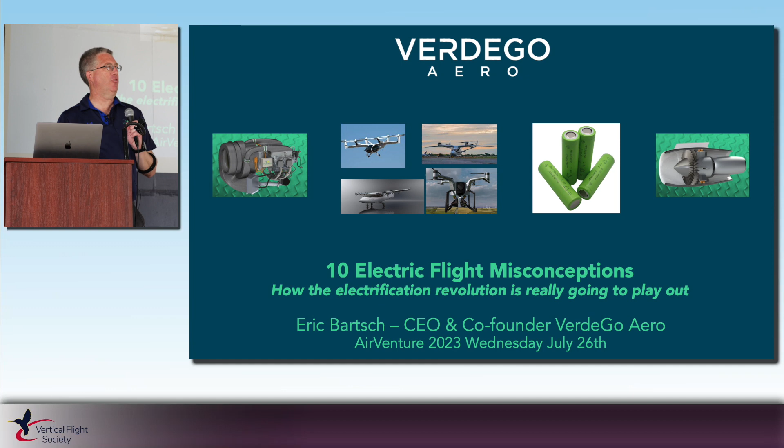So I'm going to go through the presentation that I'd like to, I'll be asking for audience participation at times, but for the rest of the questions, if we can save those for the end, be happy to address them afterwards. So my own history with electrification of flight, there are really a few different phases of it.

Going back, probably 15 years now, I was involved in the electric flight industry at a really small scale, worked with a great team at Horizon Hobby, and led a group of people that put about 4 million small aircraft into the air over those years. So we like to say that our production outstripped the entire full-scale aviation industry by many orders of magnitude. And the majority of those were electric.

There are some things that scale up from that. There are some things that really don't scale up from that.

I later was involved with full-scale electric flight. I actually got to log some flight time in some of the early battery electric aircraft, got some hands-on experience with those technologies. Learned a lot about what's great about electrification and learned quite a bit about what's not great about electrification. And as with any technology, it's a tool, can be used for the right things, can be used for the wrong things.

And then more recently, I'm one of the 3 co-founders of VerdeGo Aero, a propulsion company that is developing hybrid electric power systems for the electric aircraft market. I'll go into some of the rationale behind why we do what we do and why that's compelling for certain markets.

And along the way, I've done a lot of flying in basically any type of aircraft I can get my hands on. I'm a decent fixed wing pilot. I'm a terrible rotary wing pilot, not yet licensed there, but aspire to be it eventually.

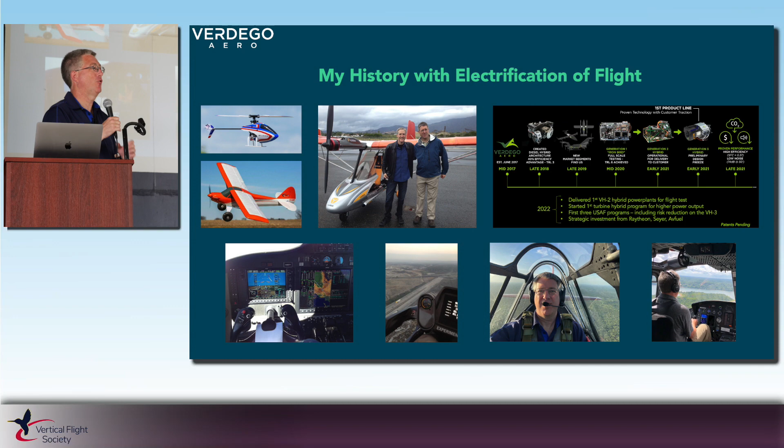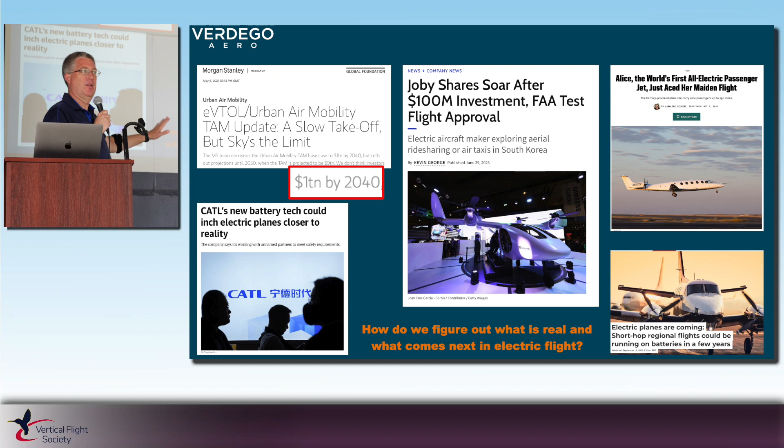There's a lot of hype out there. There are a lot of people saying, okay, this is going to change everything. There are billions of dollars flowing into companies in this space. Some of that's going in really good directions. Some of that may not be going in good directions. And so part of why I'm here today, and I think part of why you're here today, is to talk about how do we figure out what's real and what's really going to come next in electric flight, and maybe sift through all of this to find those nuggets of wisdom.

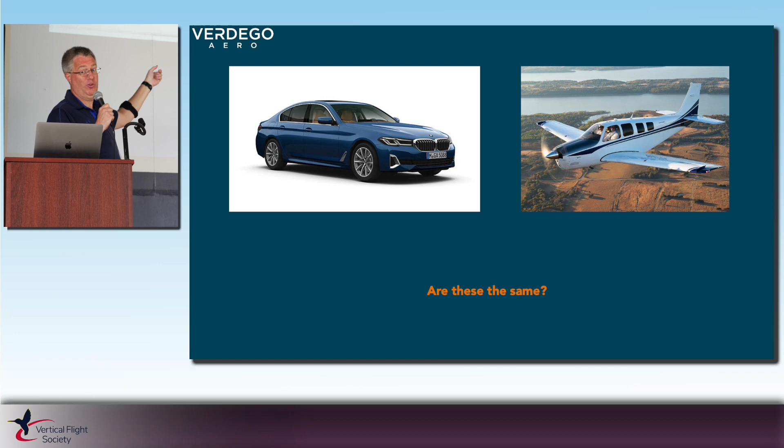So here's the first audience participation question. Are these two things the same? No. What's the thing up here, the blue thing? It's a car. What's the thing over there? It's an airplane. These are not the same thing. Now, that wasn't very hard to figure out. And they're not the same for a whole bunch of reasons: cost, weight, technologies, business model, manufacturing, regulation, performance. There's really not much in common between these two things, other than the fact that they do have internal combustion engines. So I'll give them that.

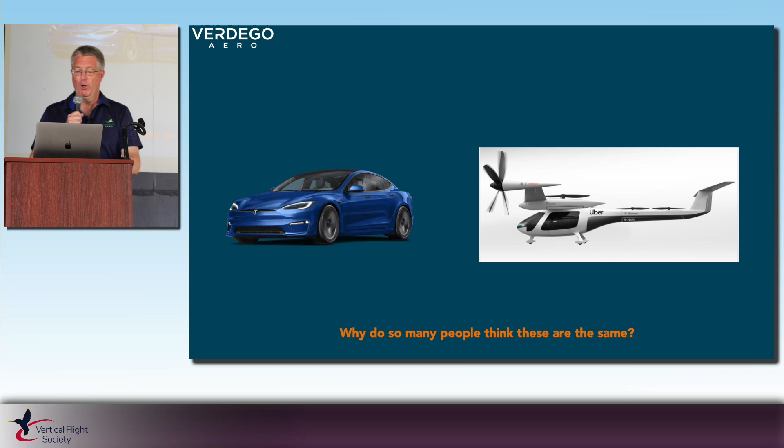It's important to acknowledge that these are not at all the same things, although electrification has a role with both of them. So what we know about electrifying and even hybridizing cars is not particularly relevant to what we do to electrify or even hybridize an airplane. Electrification is very relevant for aviation, but it's going to play out quite a bit differently.

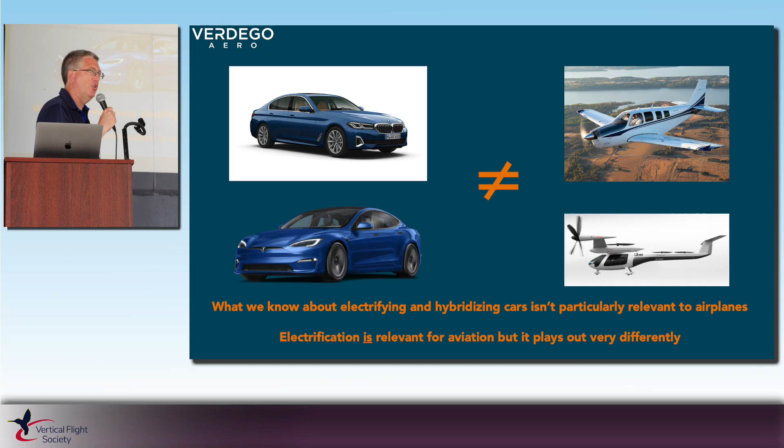So batteries, electric motors, and electrification itself are all technologies and technology tools that we can use in a variety of aircraft markets. When they're used for what they're good for, you can have amazing results. When they're improperly used, it's like banging on a bolt with a hammer. It's not going to work. And there are billions of dollars of hammers banging on bolts right now. And that's something that's just not going to work.

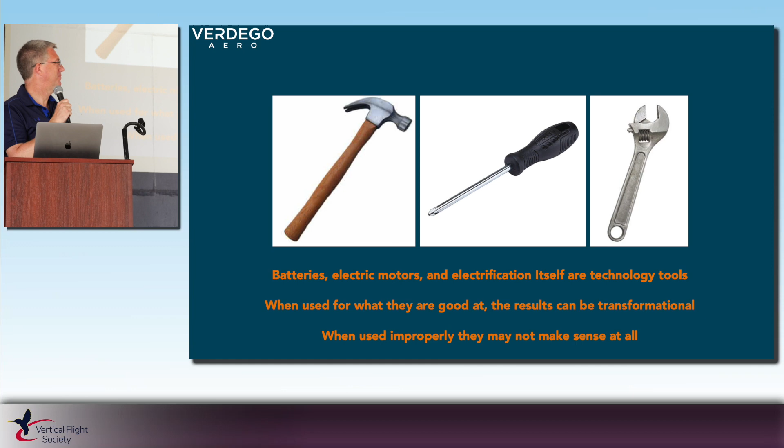And so when tools are used properly, they're great. When they're used improperly, not so great. All right, so a couple disclaimers as I go into the main part of the presentation.

There are a huge number of aircraft designs, missions, and use cases that are out there. And one of the really cool things about the current phase of the aerospace industry is that we're in a bit of a divergent phase. People are back to trying new things that may or may not work. We've got hundreds of companies going in different directions with electrification. That's a very good thing. It's a necessary thing in the early stages of adopting a new technology. And so there's a big diversity of use cases and examples out there.

My presentation today is about how electrification is likely to play out on a large scale, what the biggest opportunities and the biggest markets are. That doesn't mean that there aren't a few corner cases that violate some of the rules that I'm going to talk about. There are some. I could do a whole separate presentation on weird corner cases where there are exceptions to the rules that I'm talking about.

But today is talking about the biggest opportunities and the biggest trends that we ought to watch in the electrification space, and why some of the things that we may all be paying attention to now might not be the right things to pay attention to.

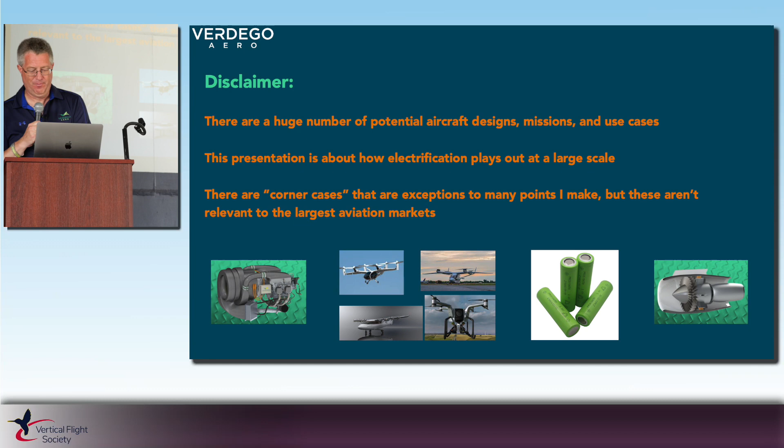So when we think about aircraft propulsion, there have really been two major revolutions in aircraft propulsion in about 120 years. One was the piston engine, because before the Wright brothers had piston engines, we had gliders. And I think we can all agree that once we had piston engines in airplanes, we had transformations in what they could do. And I'm a sailplane pilot, I love gliders, but you can do a whole lot of different things with a powered aircraft that you can't do with a glider. And then along through the 40s, 50s, and 60s, the jet engine appeared.

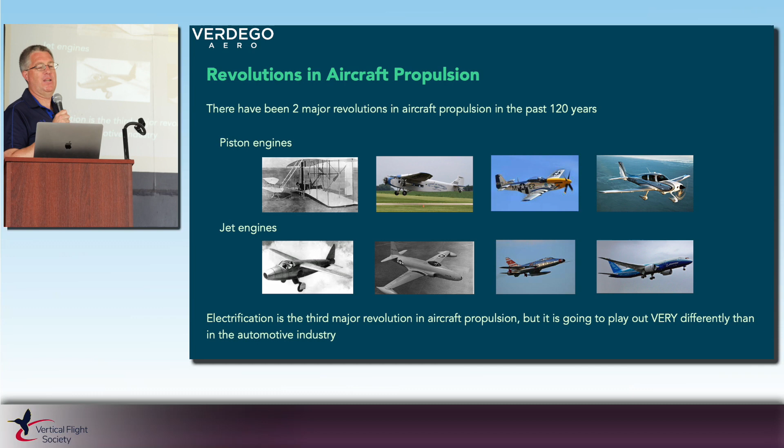And that once again created a transformation in what you could do with an aircraft. And electrification, we're at the outset of a third major revolution in aircraft propulsion, but it's going to play out very differently than how it has in the automotive industry.

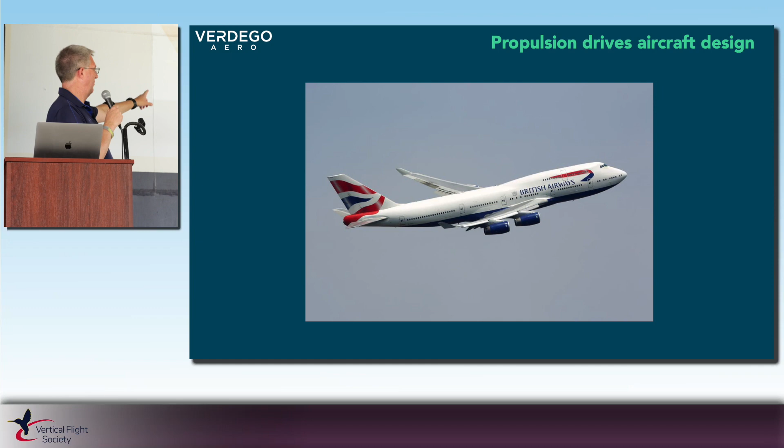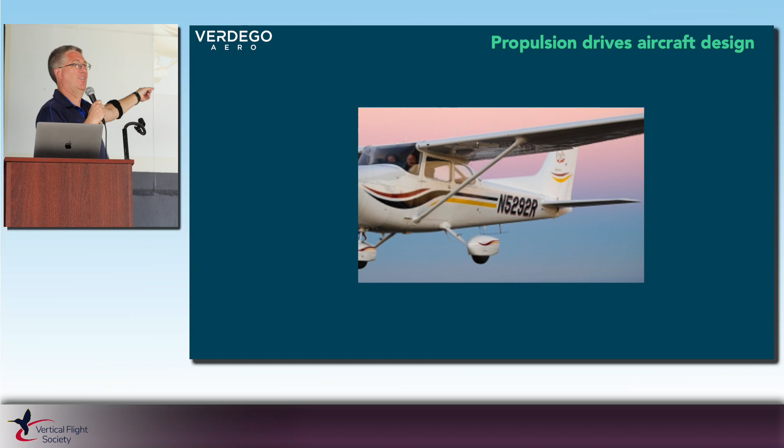So this is another audience participation question. That airplane there, you can't see the power plants or the propulsion system in any way. Is that a jet or is that a piston engine aircraft? It's a jet. That's correct. It is a jet. All right, you can't see the propulsion system here at all. Is this a jet or is this a piston engine aircraft? It's a piston. All right, can't see it here again. Is this a jet or a piston? Jet.

Piston, exactly. All right, that's a rocket. That was a trick question.

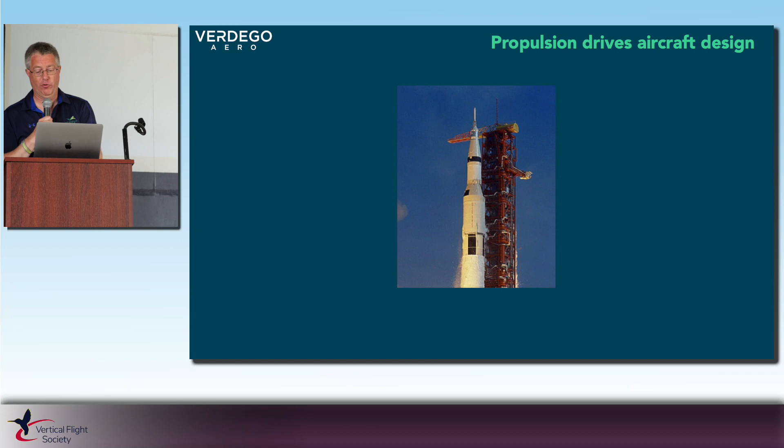The amazing thing is you could show these aircraft to the average person, but this is an aviation enthusiast audience—we know a lot about aircraft and can probably name every one shown and its history. What's interesting is we saw all those aircraft but not their propulsion systems. You know by looking at the airframe what kind of propulsion it is, because the power plant impacts how the aircraft looks, how it's configured and structured, and what missions it can do. So the optimal airframe for one type of propulsion is usually a bad fit for other means of propulsion.

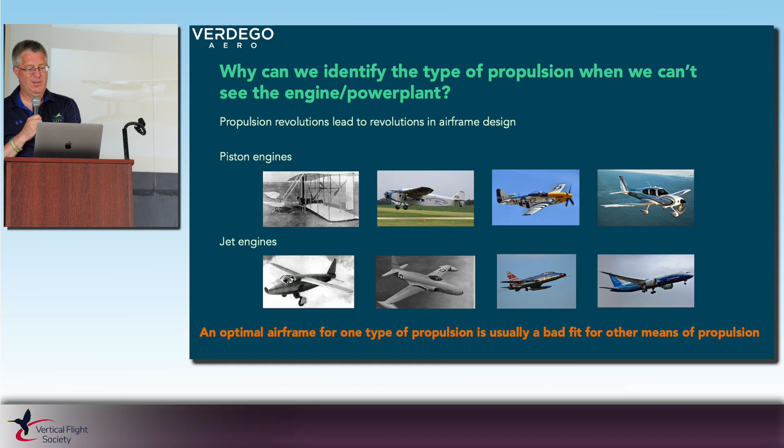That actually makes sense. Misconception number one—I said there'd be ten of these—is that electric aircraft are somehow going to look like conventional aircraft but with batteries and motors. Propulsion revolutions lead to revolutions in how you design the aircraft. Electric aircraft should look like electric aircraft, just like a jet looks like a jet. There are reasons why piston engine aircraft, jets, and now electric aircraft all look very different.

Over the next decade, we're all going to get a lot more used to looking at these things. Just as we all picked out what the jets were and what the piston engine aircraft were, there are things that lend themselves to being done with electrification.

We have to keep in mind—this is one of my favorite Photoshops—putting electrification on the wrong airframes is kind of like saying turbofans are great, Cessna 172s are great, so they'd be even better with a turbofan. You could do that, I'd even fly it, but I guarantee it would be a worse airplane in every aspect—useful load, efficiency, noise, you name it. That would be a bad aircraft. A Cessna 172 should have a piston engine in front. So that's probably not the big idea, and we shouldn't do that with electric motors.

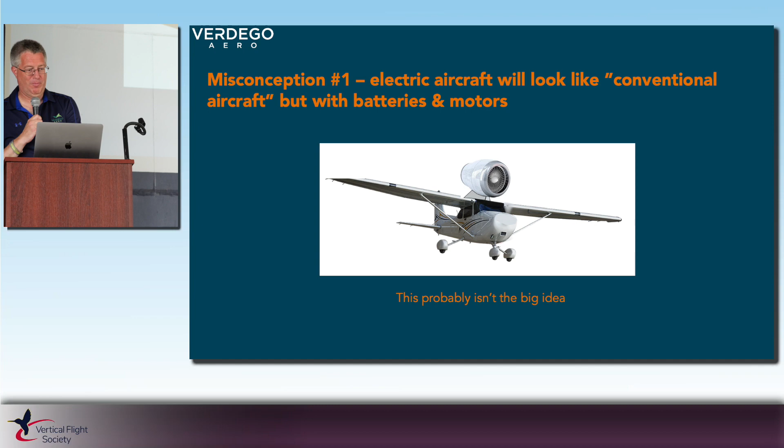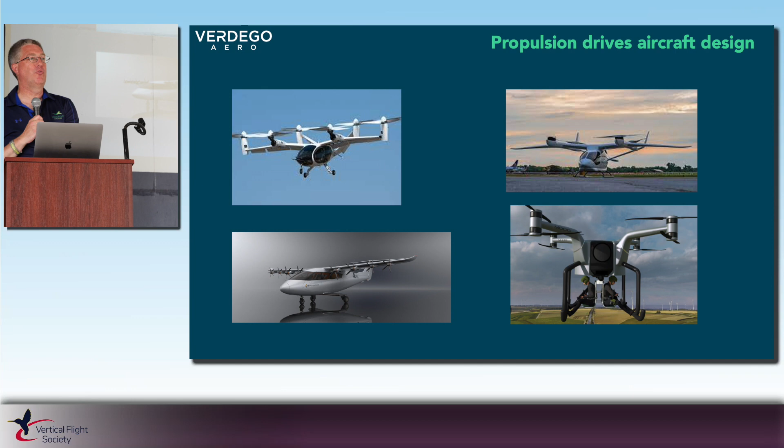I heard propellers, I heard electric motors, multiple electric motors—I like that one. Notice nobody said batteries, because batteries aren't actually visible in any of these aircraft. What is visible is a bunch of electric motors scattered around an airframe doing different things. In some cases we're managing airflow over the whole wing, in some cases converting from vertical to horizontal flight. You can see that all of these aircraft are built around having a bunch of electric motors. That's different—something we don't typically see with piston engines or turbine engines. There's a reason for that.

Electric motors are amazing things. They are responsive, lightweight, have unique torque curves, can run at really low RPM or high RPM, and scale in size differently. It's actually practical to have a whole bunch of electric motors instead of one or two big ones. They're reliable, simple, low cost, and we have high performance solutions right now. These technologies exist—there are companies out there that can make great electric motors you can put on an airplane. I'd say electric motors are the biggest idea out there in electrification, the enabling technology that makes electrification interesting.

Next on the list, power transmissions. There have been a lot of really interesting experimental aircraft programs, particularly in the 50s and 60s, for convertible aircraft designs that could fly vertically and horizontally. The Achilles heel of almost all those programs was both control and mechanical complexity. There were drive shafts, gearboxes, and all manner of systems to transmit power around those airframes, resulting in a really complex, really unreliable powertrain. Those aren't particularly good things in an aircraft.

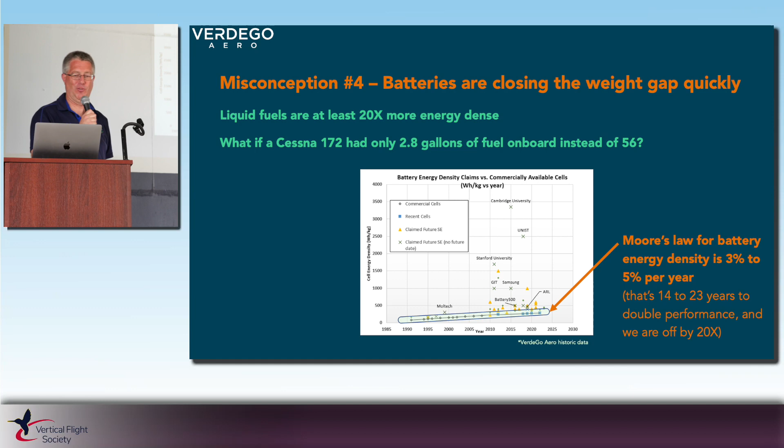So, all right, batteries, they haven't progressed. Let's set aside what I just talked about. Let's say, yeah, but what if one of these things announced about energy density comes true and batteries get a whole lot lighter? Is energy density the only thing holding us back, or is that just the thing we talk about most? Well, there are a lot of things actually holding us back. Energy density gets the attention because there's a factor of 20 problem there. But I'll say that if all we had in aviation were batteries, and someone ran in with a gallon of jet fuel or avgas and said, hey, check this out, I've got a different way to package energy, they'd get a Nobel Prize. There'd be a statue in the center plaza of AirVenture for them.

So liquid fuels get lighter as they are used. Batteries don't. You can trade energy for payload. I think a lot of us in the room that are pilots, sometimes you take off with fuel to the tabs so you can put an extra person in the plane. There is no such thing as filling a battery to the tabs when it comes to weight. It weighs as much whether it's empty or full. The last drop of fuel is as good as the first. Batteries have a particular issue where as they drain, you can't pull power out of them to the same degree you could at the beginning of the charge. That's a big problem because as pilots, we're used to consistency. We like to make sure that at the end of the flight, the powertrain behaves as well as it did at the beginning of the flight.

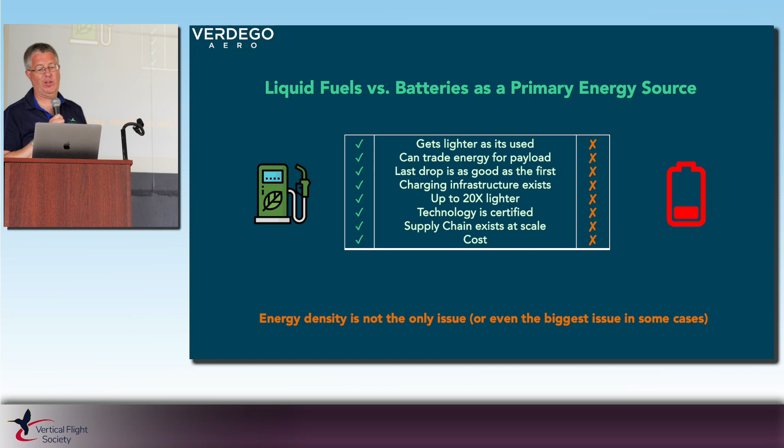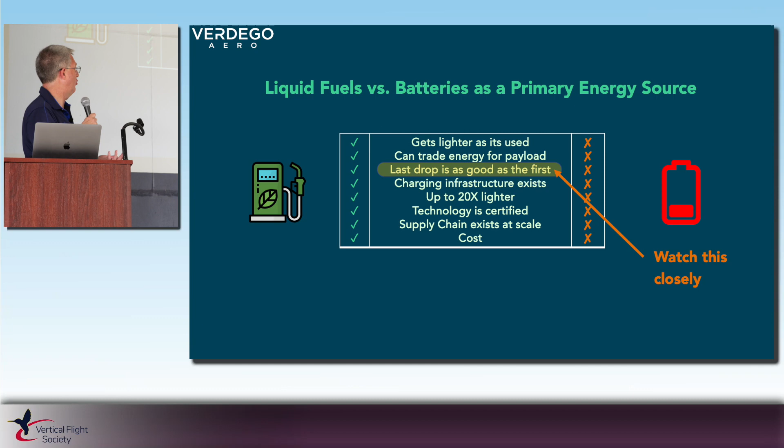It's not even the biggest one in some cases. And the one that I've experienced firsthand as a pilot in the air in a battery electric aircraft - that last drop being as good as the first - that's a really hard one to solve in a battery. Even if you had equal energy density between liquid fuels and batteries, some of these others are really big Achilles heels for using a battery to be the primary way you store energy in an aircraft for its mission.

So misconception 5: batteries just need to get lighter and then it all works out magically. It doesn't. Batteries need to get better in a whole bunch of ways if we want to use them as a primary energy source in aviation. I'll get back to that one in a few minutes here, but that's really important.

So what about really, really short flights for battery-operated aircraft? That's something we talk about a lot. Well, if we just want to go a really short distance, let's start there, because then that's all going to work out. So we're going to do these short hops. We'll leave the long flights till later, push that one down the road.

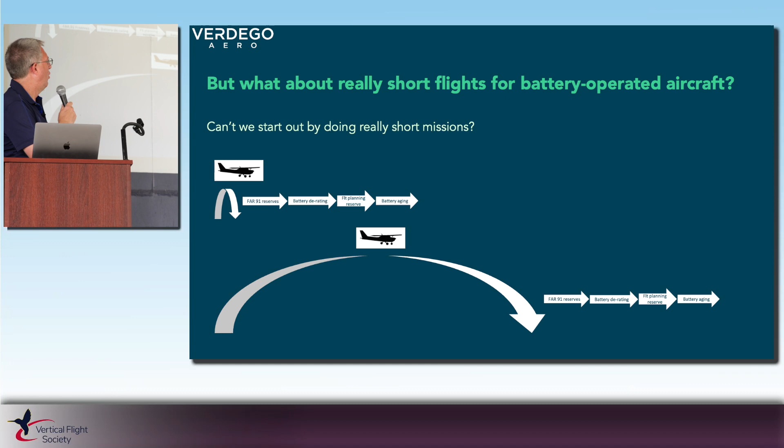Well, we can't just plan energy on an aircraft for where we're going to go. We have to think about energy reserves. We need to think about derating in the case of a battery, because you can't get to all of that energy. We need to think about flight planning reserves - are we going to be able to go in a straight line or not? We need to think about the aging of the battery. As I mentioned, the battery effectively shrinks every time you use it - it's like you've got a fuel tank that shrinks a little bit every time you fill it up and drain it. We've got to flight plan and write the manuals for the aircraft as if the battery's at the end of its life, not the beginning of its life. So the problem is that all of this other stuff is the same whether you're flying a really, really short flight or a really, really long flight.

That gets us into these weird design spaces where our team has looked at design cases where your energy reserves are all of a sudden 10 times what your mission is. That's something we've never really dealt with before in aviation. We're always used to the mission being the majority of the energy, with some reserve added on for safety. That can get flipped completely. If you're looking at really short missions, the reserve becomes huge, and you may have a 5-mile flight that requires 150 miles of extra energy on board to be legal and safe.

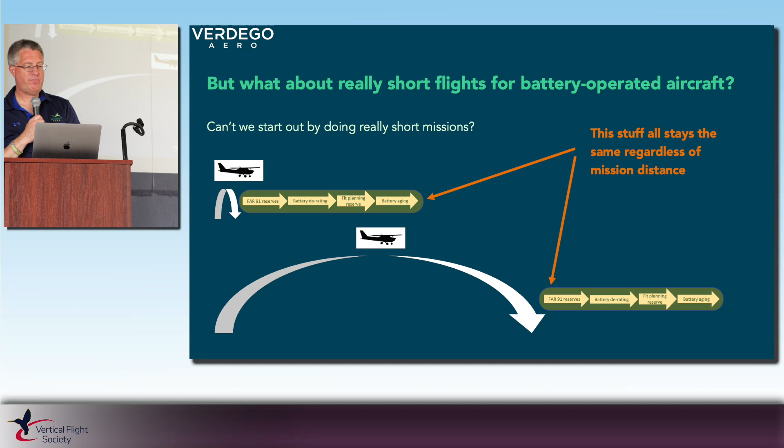So, misconception number 6: operating a really short flight gets around the limitation of batteries. And it does, to an extent, but perhaps not enough to really help us do the things we want to do. We wind up with a whole lot more reserve energy than mission energy.

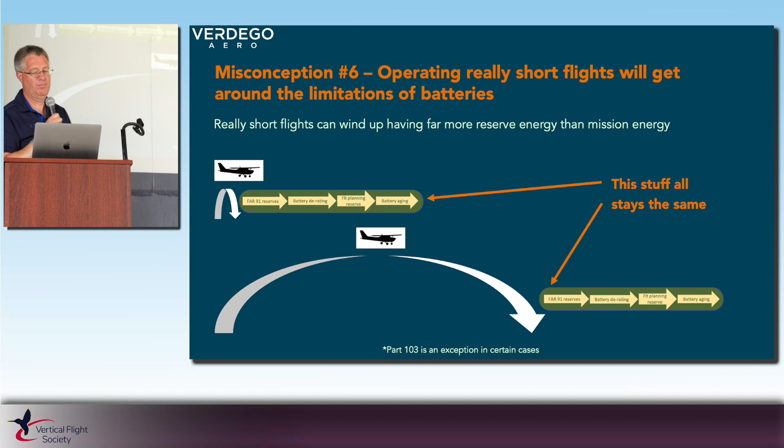So if batteries aren't able to deliver the mission capability we want in the aircraft, is there a point to electrification at all? Should we abandon this and go in a different direction? If there's a 20 times energy deficit, why would we bother doing this? That's an interesting question, especially for those of us who work in this industry. So, unsurprisingly, I have some answers to that.

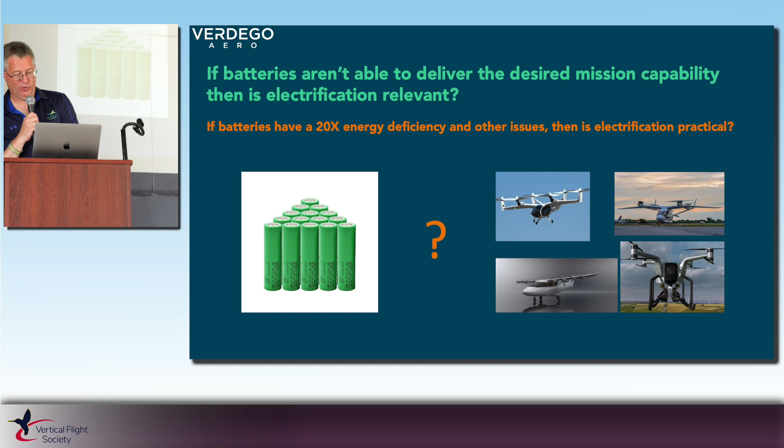There are some interesting motivations for electrifying an aircraft that allow you to design something you couldn't have before. One of them is distributed electric propulsion — having a whole bunch of motors instead of 1 or 2 propulsion units. That allows you to control the airflow and control the thrust over a lot of different places on the airframe. That's kind of interesting.

One of the things you can do with that is merge together attitude control and propulsion. Every small-scale drone sold in the hobby industry does that — the attitude control, the pitch, yaw, and roll, is driven by the same electric motors that drive the propulsion. So all of a sudden you can blur the lines between those things.

You can do active aerodynamics. You can control the boundary layer over parts of the aircraft. You can have different numbers of power generation and thrust units. And you can optimize for peaks and valleys of power — optimizing for steady state energy consumption in an aircraft versus the peaks you might have on takeoff or climb.

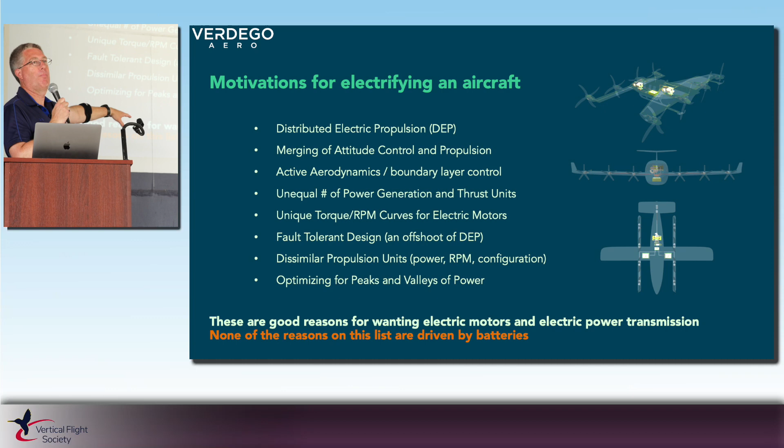One of the things that then comes into play is the concept of a hybrid electric power plant. Full disclosure, this is what my company VerdeGo works on — I could talk forever about these, but I won't. A hybrid electric power plant: liquid fuels go in, propulsive electricity comes out. That enables the benefits of electric motors and electric power transmissions to be realized, and gets around some of the mission-related limitations of batteries.

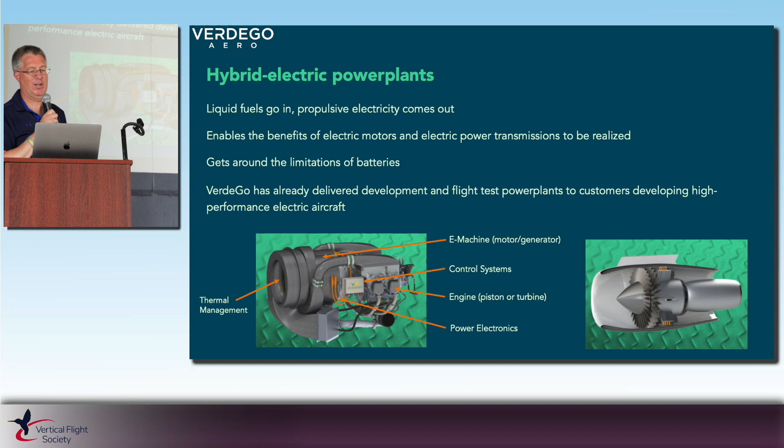These systems, whether designed around a piston engine or a turbine engine, bring together a conventional piston or turbine engine, a motor generator, power electronics, control systems, and cooling and thermal management systems. What you get is an integrated unit that can provide propulsive energy electrically and in some cases mechanically, depending on if it's a series or parallel hybrid configuration. That allows you to have aircraft that depend on electric motors but have a lot more mission capability.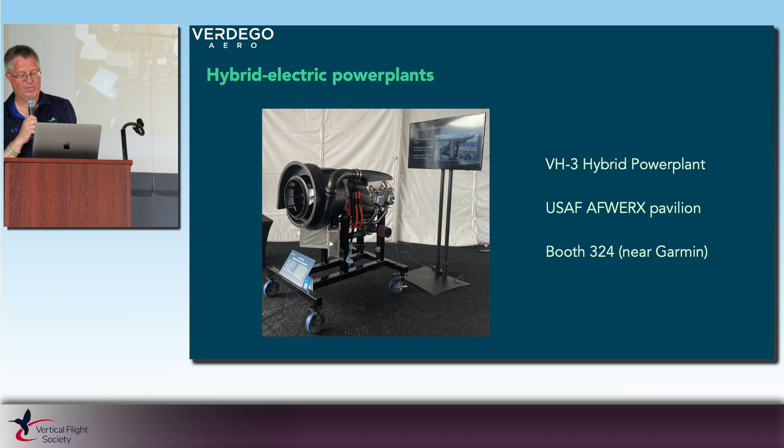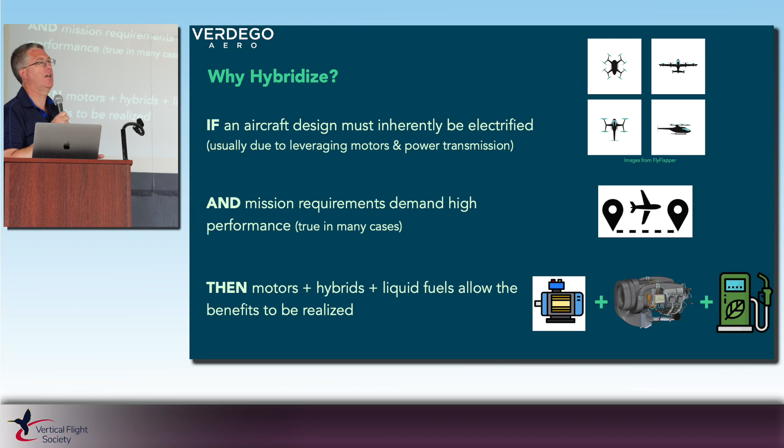So why might we want to hybridize an aircraft and put a hybrid power plant in it? There's really a simple equation that governs that. If an aircraft design inherently has to be electrified, you can't have that architecture any other way. I've got some silhouettes of strange looking things that look like electric aircraft, and the mission requirements demand high performance. Using electric motors and power distribution in those aircraft is the only way you're going to get that aircraft. Using hybrids and liquid fuels is how you get the mission capability, and that's how you make this whole thing useful - you design an electric aircraft and run it on liquid fuels, but you're getting an aircraft you couldn't have before, potentially one that can do a mission profile it couldn't do before.

Misconception number 7: batteries have to get a lot better before electrification is compelling. There are a lot of things we can do right now with technologies we have right now by applying hybridization, liquid fuels, electric power transmission, and electric motors. In fact, there's a lot of exciting work going on for both military and civilian missions doing just that, combining these things together. We don't have to wait 5 years or 10 years or 25 years for a technology to get better. We can combine technologies that exist now - building blocks, Legos if you will - and plug them together in different ways to get things that are viable in the near future, not the far future.

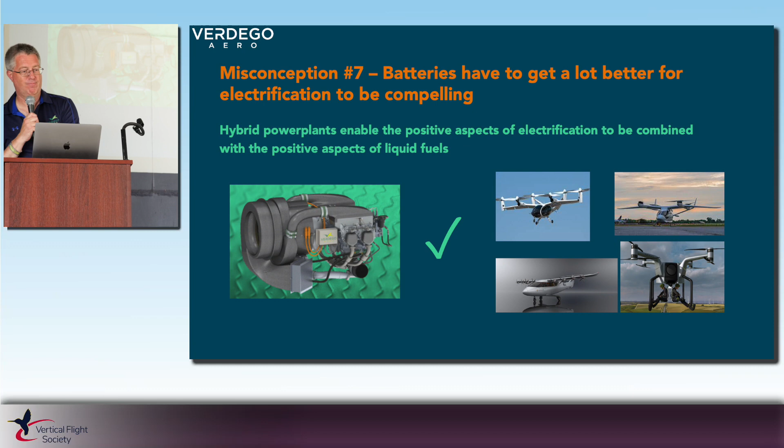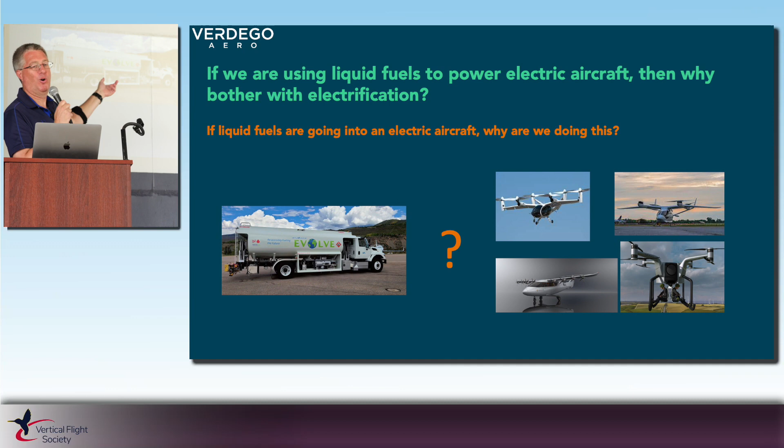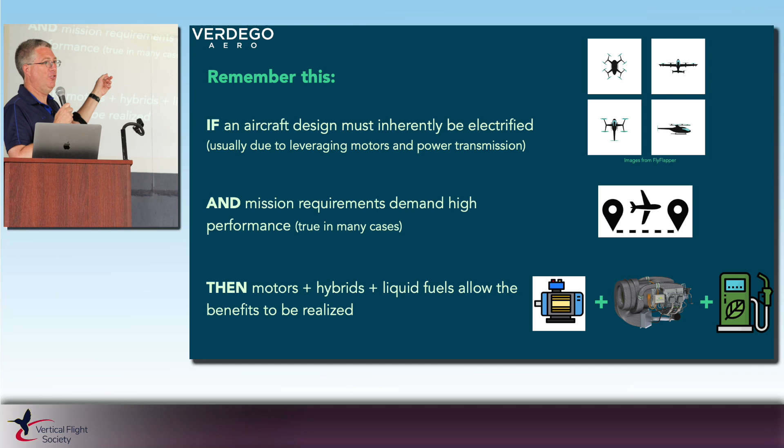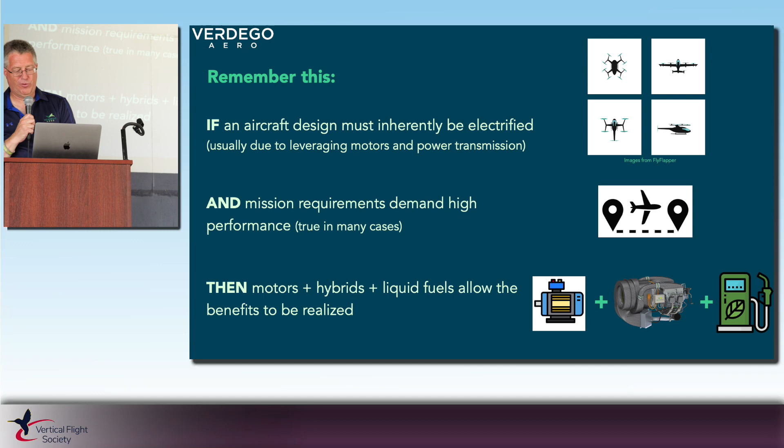At the same time, one of the big factors here is that when we look at using liquid fuels in an electric aircraft, there's a big trend going on right now in parallel with electrification, and that is sustainable aviation fuel. That's a much bigger trend for the jet fuel market than the avgas market. It's really critical that billions of dollars of investment are going into creating manufactured liquid fuels that are basically jet fuel, but with a much lower net emissions profile. In a lot of these cases, you're pulling carbon out of the atmosphere when you make the fuel, you put it in the plane, you release it back into the atmosphere, and you keep going around that cycle such that you've got either very low or no net emissions.

So the R&D for these fuels is largely done because they are certified. United Airlines, as an example, has already done revenue service flights with transport category aircraft with SAF in the fuel tanks. So this is certified, it exists. The big challenges for SAF are getting the supply chain large enough and the costs down low enough so that it's viable. But when we talk about liquid fuels, it's not just the liquid fuels we have right now - there are also the liquid fuels we'll have in the future.

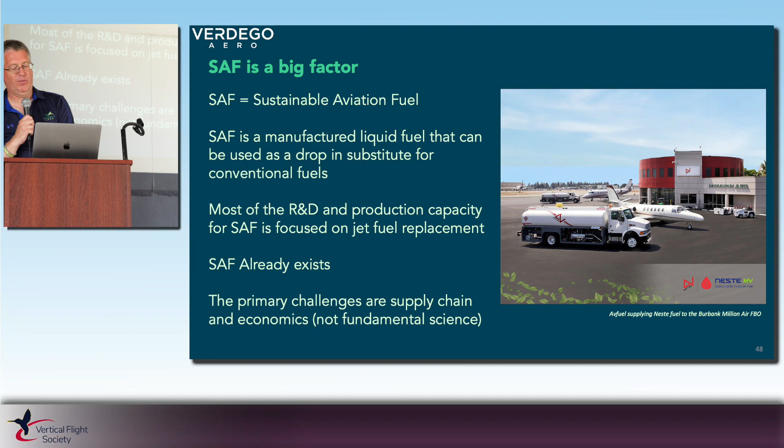Liquid fuels are a more convenient way to package energy than a battery as a primary source of energy. As we look at the gigantic value of all the infrastructure, all of the transport category aircraft, and the fact that SAF already has huge momentum, I would say that SAF is an inevitability. We're going to see more and more of that, and that's already way down the path. Hydrogen and really energy-dense batteries are not necessarily an inevitability. They might play out, they might never play out.

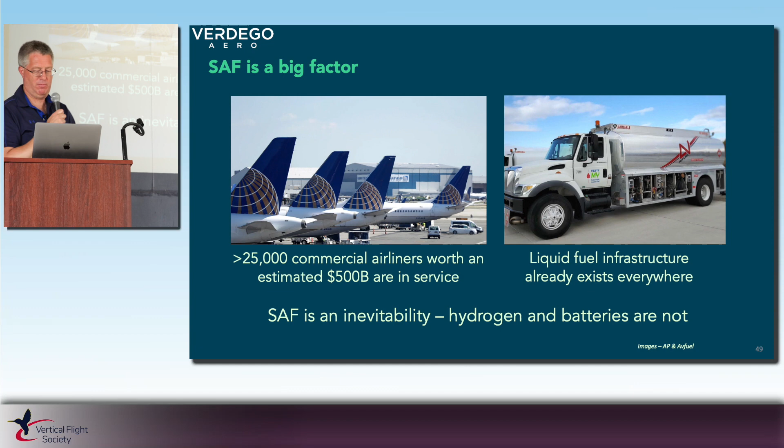So remember this equation again, and I've modified it just a little bit: if an aircraft has to be electrified and we need significant mission requirements, then motors and hybrids and SAF allow you to get those benefits sustainably. It brings together two things that are often thought of as separate directions in sustainable aviation: electrification and sustainable fuels. Those have separate paths that they may take. You may also see those come together in some applications and be two parts of a bigger picture.

Misconception number 8: electric aircraft are only driven by sustainability. People often think we're electrifying to be sustainable. Well, yes, in some cases that's true, but that's not the only purpose for electrification. Remember that list of motivations for electrifying an aircraft? A lot of those could be applied in the name of efficiency or lower operating cost, but they could also be applied for more maneuverability, higher redundancy, higher safety, lower noise, other things not related to sustainability. So electrification is not just sustainability. Electrification is how you get new types of aircraft that we can't have right now.

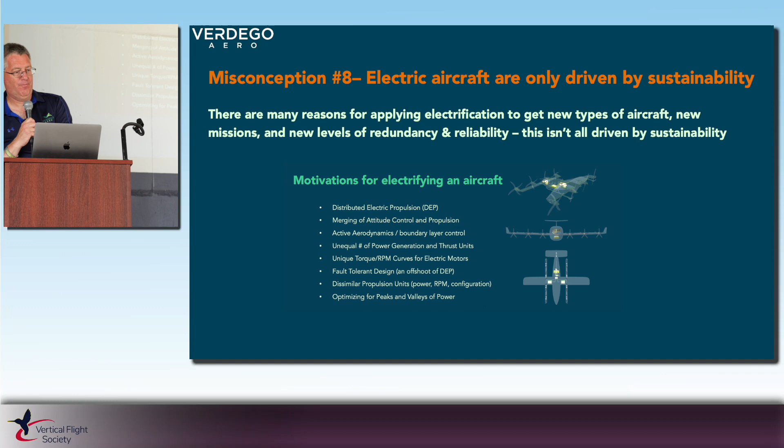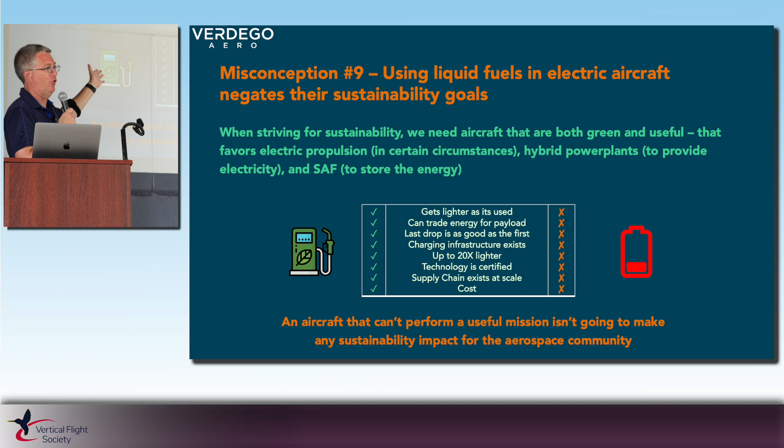However, the converse is also true. Misconception number 9: if we put liquid fuels in the electric aircraft, then we're completely negating the sustainability goals. That's not true either. When we design these aircraft with distributed electric propulsion, they're inherently more efficient to operate than a conventional aircraft. So right there we can make something that consumes less fuel and emits less pollutants. We can use SAF as the liquid fuel in these aircraft and get some pretty dramatic reductions in emissions. So even using liquid fuels, we aren't negating the fact that we can achieve impressive sustainability results for aviation using a hybrid electric approach, where sustainable fuels come together with the benefits of electrification.

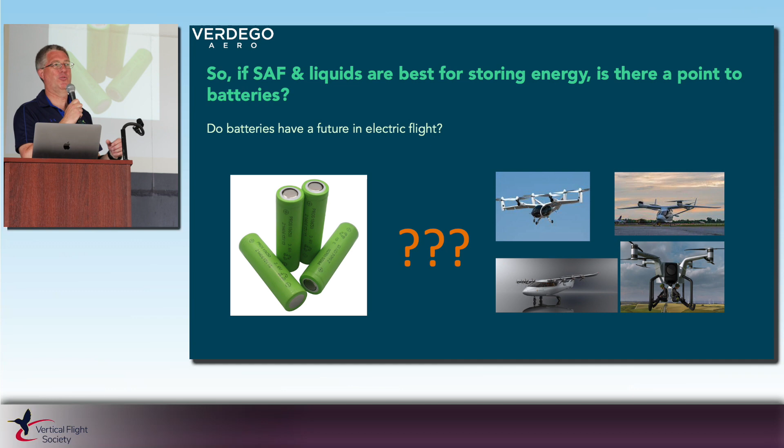This is one I like: if sustainable aviation fuel is great and liquids are best for storing energy, is there even a point to batteries? I've said a lot of unflattering things about batteries. Is there a point to these? This is kind of the flip side. I hear a lot of people saying batteries will never be useful, they'll never amount to anything. That's not necessarily the point I'm making, and this comes back to the right tool for the right job.

Let's talk a little bit about cars. Even though cars aren't very relevant here, there are a couple of analogies we can draw. How many people have heard about range anxiety in electric cars? How many have experienced it? I've experienced that driving toward a charging station a couple times. It's very real among electric car owners, and having flown a battery electric aircraft a few times, it's really, really real in the air. Watching it discharge is not fun. So range anxiety is not a good thing.

Range is all about energy. But how many people have been in a Tesla or electric car when someone really stepped on the accelerator and went fast? That's impressive — you have four-door family sedans that can out-accelerate a Ferrari. So there's something different there. We never used to have that in the automotive world. Acceleration isn't about energy, it's about power. And the only people with acceleration anxiety are the people designing gas cars right now, because they can't compete with what the electrics can do. This starts to hint that we've got a tool here that's useful, but maybe we're applying it the wrong way.

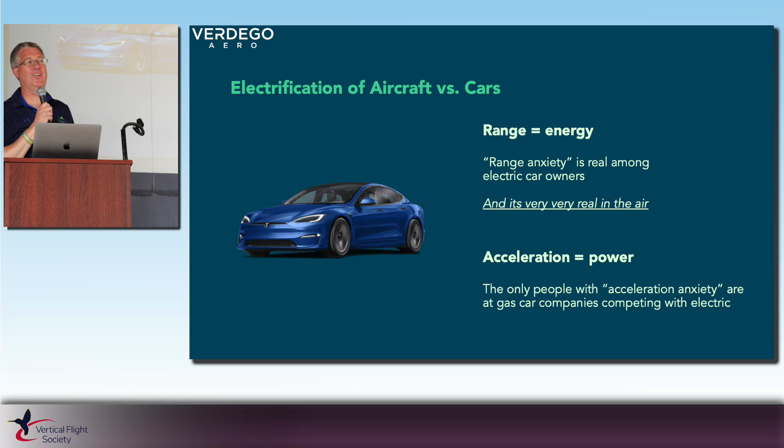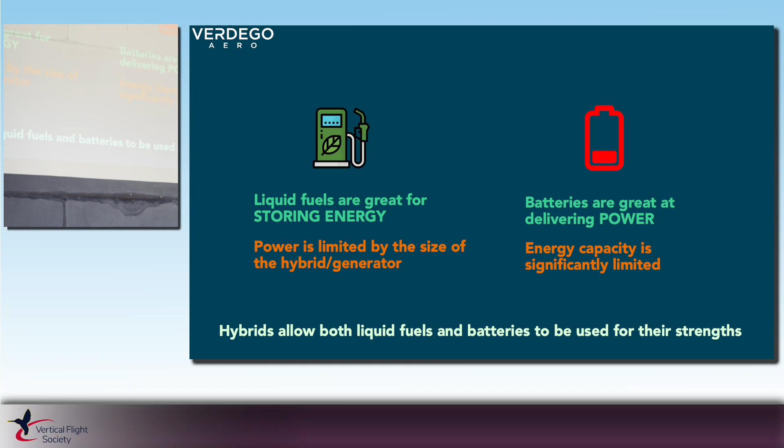Liquid fuels are really good at storing energy — there was that whole list of things I mentioned earlier. They get lighter as we use them, and we can trade payload for onboard energy. But the power you can get out of liquid fuels, unless you light the whole tank of fuel on fire all at once — and that's not a good idea — is limited by the size of the generator or engine. You can't just tell a 300 horsepower engine, 'why don't we run you at 1,000 horsepower for just a minute and see what happens?'

It's going to melt. Now, on the other hand, batteries are great at delivering power. You can have a battery pack delivering a nominal amount of power, but then go to multiples of that level and pull it out for a short amount of time if you want to. That's something we could never do before with liquid fuels and piston or turbine engines. Now, the energy capacity of those batteries — that's that whole 20 times problem, a big problem. But power is really interesting. One of the reasons hybrid electric systems are interesting is that they allow both of these things to play to their strengths.

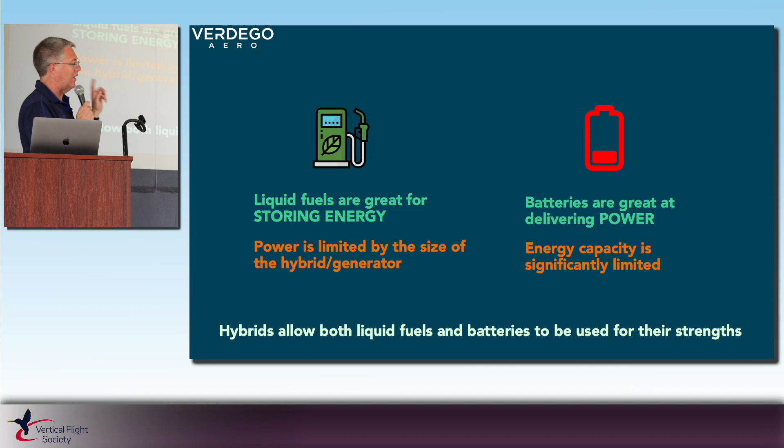So it's not that batteries are bad or good, and it's not that liquid fuels are bad or good. They're tools. And I go back to that slide that I had with the hammer, the wrench, and the screwdriver. We have billions of dollars of hammers as wrenches and wrenches as screwdrivers going on in some cases in the industry, and we need to start thinking about how do we really practically use these things. So a 20 times energy deficit is really not great when it comes to using batteries as a primary energy source, never mind that other list of things that I had up there.

But immediate power availability is really, really interesting. I'll give you a concrete example to think about. You look at all of these multi-rotor vertical takeoff electric aircraft, the Jobies, the Betas, Archers, things like that. The electric motors, one of the great things about them is they're very responsive. So you can quickly go from low power to high power back and forth. That helps you maneuver these aircraft really nicely. It helps you do the attitude control with the propulsion system.

But because those things can all react really quickly, you can have very short duration transient spikes in your power demand where it goes way up and way down, and running that directly into a power generation system isn't a great idea. That causes you a lot of problems. Having batteries on board the aircraft that can buffer that and that can be complementary to the power generation system is a great thing. That is a great application of batteries. So batteries play a significant role in making electric flight possible. It's just not necessarily the role we all think that it's going to be.

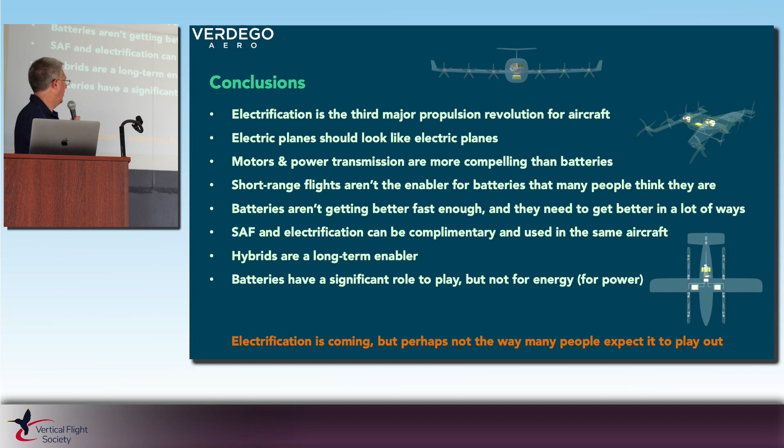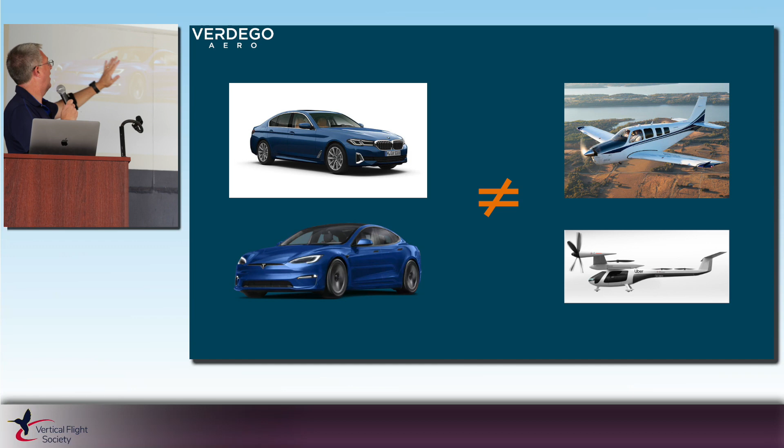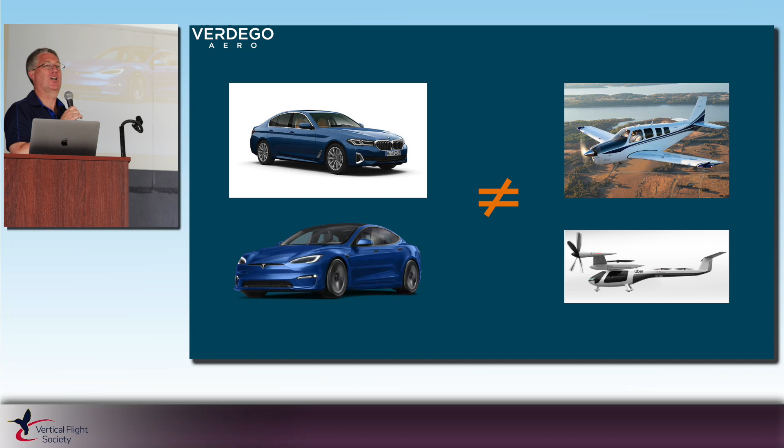So electrification is coming, but maybe not the way we expected it to play out originally. And we need to just remember, airplanes are not cars. And we all knew that. Everyone raised their hand and knew that at the beginning. And yet, I've seen billions of dollars flow through that logic process that says Teslas are cool, therefore we're going to make battery electric aircraft, and that's going to be really cool.

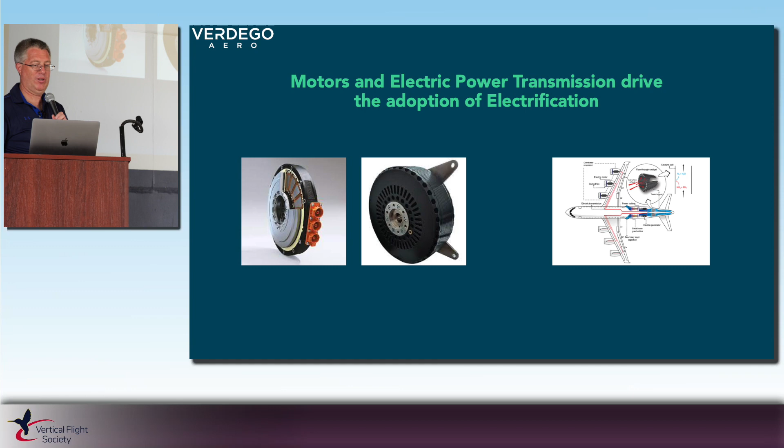So, right tool for the right job. Let's use motors and electric power transmission, focus on those things. And probably most importantly, let's start looking for what those electric aircraft are going to look like, because those are some of the early stages of electrification. There are probably things that no one has seen yet, or that are behind closed doors right now, that people are doing with electric motors and with power transmission. They're going to be really compelling, but in the end, a piston engine aircraft looks like a piston engine aircraft. Jets look like jets. Electric aircraft are going to look like electric aircraft for good reasons.

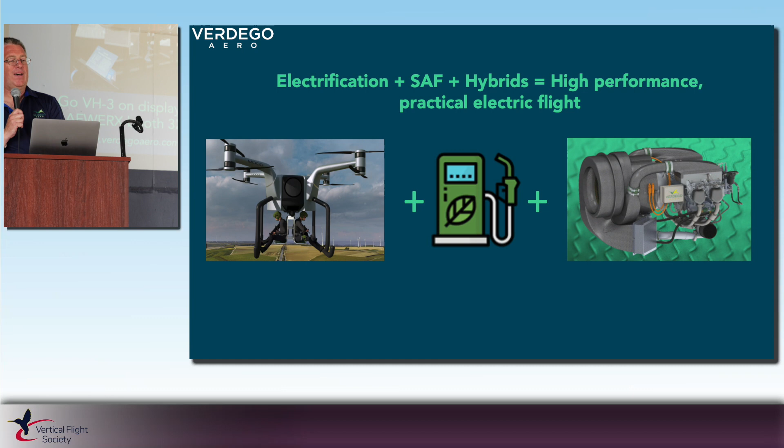So with that, I'd like to close my talk, and I'd also like to say, if you're interested in more information on this topic, we've got some hardware on display over at the AFWERX booth that's right across from Garmin. And Dr. Pat Anderson, who's the father of hybrid electric aviation and VerdeGo's Chief Technology Officer, is going to be doing a deeper dive into technically how do you assess the viability of different designs of electric aircraft. He's on forum stage 6 just down there at 10 a.m. tomorrow. So 2 great opportunities to learn even more.